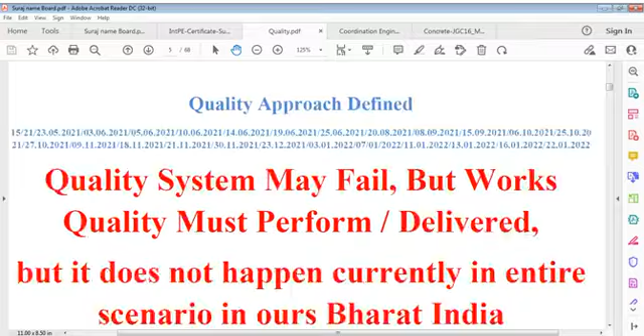We have to say, without intent to compromise, just in name of a fragile system, we make our systems at national and international level both, but we do not care for them because we just make system and think it's working automatically, complying automatically. That's just a formality, nothing.

I can say today these systems have got no meaning because products don't have quality inbuilt or quality coefficient to requirement. Therefore, quality is not in system, quality should be in product, and quality system does not guarantee that you shall get quality product. Quality is not in system, quality is not in material. This means there exists no quality in professionals, there exists no quality in workers, there exists no quality in technicians.

Everywhere quality misses. We try to say I have done so much work, but what percentage of quality I have done, I also don't know, because it is not one person's job. You take manufacturing, you take processing, you take construction, you take others. It is a group job. Nowhere does one person work alone.

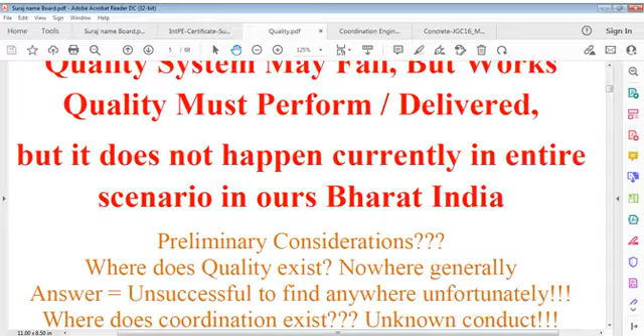That is the professional freelancing job where you can expect, if you are interested, you can get quality. Otherwise, you cannot get it. So again, I say our consideration should be, where do you exist in the idea of quality? I am in search of you. Please come and tell me. I want to take your help, and please give me help.

But he says, I have already helped. I have been helping. You are not serious about me, so why should I be serious about you? I don't find any answer from there, or you can say I don't find any reliability from my friend quality, who has defriended me, who has thrown me out, because we don't respect quality.

Quality lies within our minds, within our conscience, but we don't use it, and this means that we are red lines ourselves and not others. And can we bring it back?

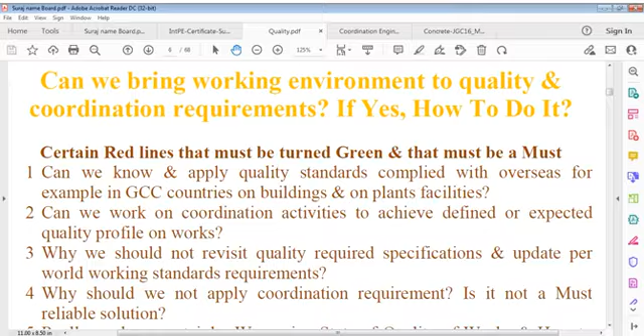My question is, can we bring working environment to quality and coordination requirements? And if I say yes, how to do it? And if I say no, why? This is not written all here, but that is the interpretation, you can say, construction of what I'm saying. And I say certain red lines that must be turned green, that's important, and that must be a must. It's not simply saying it should be, that must be a must. This means it has to be done.

So can we know and apply quality standards? That's my question to myself and to yourself. Can we know and apply quality standards? Okay, we know something, we know everything, we know books, we know rules, we know standards, we know everything, procedures, all that. But can we apply? That's my question.

We always say we are leading society, we are going to be number one in the world, we are going to lead others, but can we even equalize ourselves to existing countries near us or around us? We do not know about that. We only say we direct you, while we do not direct ourselves.

I have given an example of GCC countries, Gulf Cooperation Council countries, where there are 6 or 7 countries. If you even follow them in quality, you can change yourself. Our engineers go there, I have been where they are, and I know how they systemize everything. They are serious people. They don't want to waste money, they don't waste time, and they do something durable.

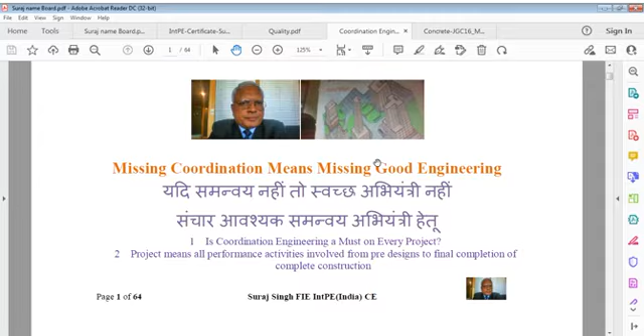That's how our question, our consideration, says: is coordination in engineering a must? That's a question mark—you have to answer it yourself. Is coordination in engineering a must? Everybody says—sometimes I've seen many people say, 'I'm a coordinator,' but what coordination means, they don't answer. See, there's a difference between coordination and liaison.

I'm not talking of liaison. Liaison is a part of coordination, not a domain in itself. Sometimes people interact with each other and consider this coordination—no, that's not coordination, that is interaction. There's no difference because you're just coordinating with others, or chatting with others, and sometimes talking of work, but that cannot be called coordination engineering because that's interactive engineering.

Coordination is where information is required. You don't have information, you seek that information. Without that information available, you cannot do anything, you cannot proceed further. Therefore coordination is a technical term, an engineering term—it demands something. Every activity demands something, every urgency demands something. We have to bring some information, or many pieces of information, to one place if that information is required for some activity to move, and that information should come in time also.

It's not that we get the information now and say, 'I'll provide you this information later on.' How can you then move this work? You cannot move that work. And that's where coordination has many orientations—it has many inputs, and it requires inputs instantly. It doesn't wait.

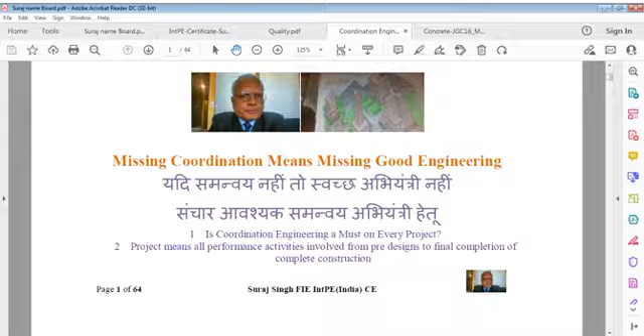There are many projects in your life. Being an engineer, you may have 10, 15, 20 projects in life, depending on length of projects. Sometimes you have hundreds of projects, maybe very small ones.

There are many questions we can raise here. Engineering community has to answer and raise itself: what's quality and coordination, how you can define that in respective involvements in entirety, how these are applicable. Can we ignore these domains? That's the point - if you can ignore this, what shall you get? What benefit do you get if you ignore these domains? And the benefit is no benefit. You can't ignore it. If you ignore this, you ignore yourself, you ignore your capacity, and that is a very dangerous situation.

You cannot ignore it. So quality and coordination can't be ignored - these are respective involvements in respective terms with each other. We can't ignore them. So what do engineers think about these issues? Whatever you talked about working, what do you think about that? Do you think or not? If you think, what do you think, and to what degree? Many questions come out - how many of us conduct work for quality and coordination engineering?

It's the right time to contemplate and deliberate on this subject, because if you start quality work, believe me, if you care for quality, all the world would change. If society cares for quality, if engineers think of quality, if workers think of quality - this is my first requirement.

Just like in safety we say, I should be safe first. In safety domain - the common domain of safety, health and environment - what do you say? First let me be safe, then I will start work. And it's right, I have to keep myself safe, keep others, my colleagues, my workers, co-workers safe. I have to keep everyone safe, then I start work. What's wrong with that? It doesn't mean you have to spend more time - time is the same, only the conduct, how to conduct, is different.

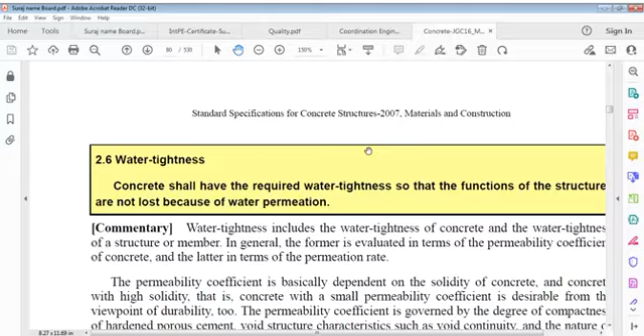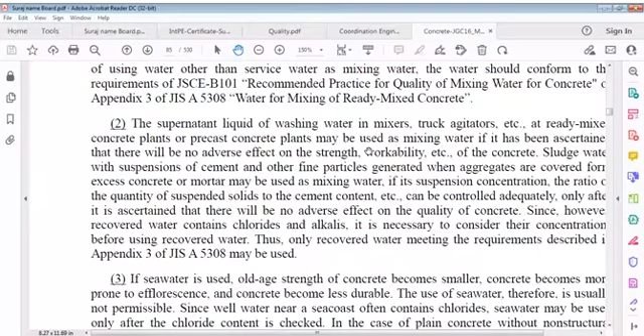And we're talking about items of concrete last time. Of course, it's very important. We have covered many pages on this, and water tightness we are talking, and we are talking about constituent materials, cement, etc. We talked about mixing water, I think we talked about this, right? And also aggregates, fine aggregates. On this page, I think we did not talk, so we have to go to it.

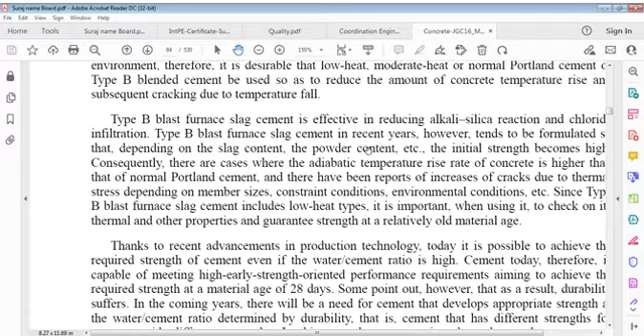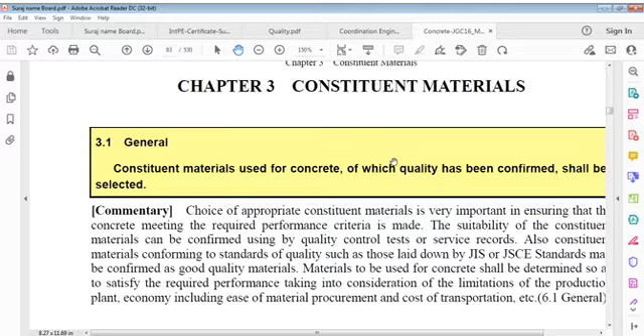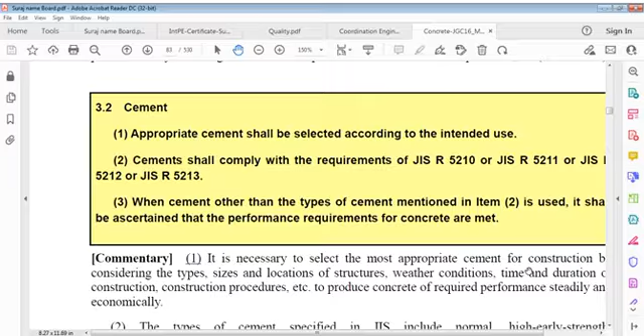It says cement, appropriate cement shall be selected according to intended use, and that's true. Cement shall also comply with requirements. When cement other than types mentioned is used, it shall be ascertained that performance requirements of concrete are met. That's true. Now what does the commentary say?

Let's come into here, let me put off my switch of battery so that it keeps on working, and let's see how does it work. And let's put a battery also.

Weather conditions, time and duration of construction - I think we should keep something here, duration of construction. It's necessary to select the most appropriate cement for construction by considering type, size, and location of structures, weather conditions, time, and duration of construction procedures, and to produce concrete that performs steadily and economically.

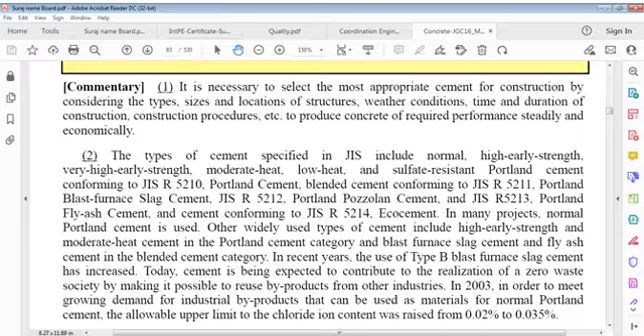Types of cement specified include normal, high early strength, very high early strength, moderate heat, low heat, and sulfate resistant Portland cement; blended cement conforming to Portland blast furnace slag cement, Portland pozzolana cement, Portland fly ash cement, and cement conforming to eco cement. I think we have gone through this eco cement in many projects.

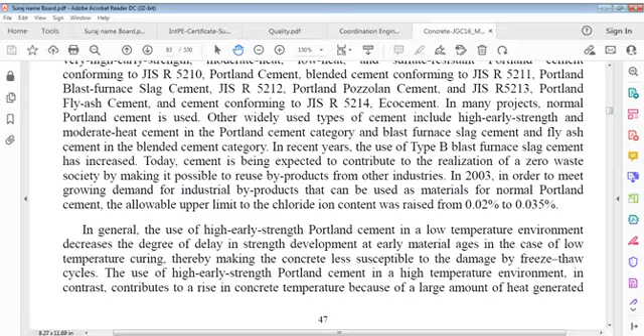Normally, normal Portland cement is used. Other widely used types of cement include high early strength and moderate heat cement or Portland cement, and blast furnace slag cement and fly ash cement.

Blended cement is being expected to contribute to realization of a zero waste society by making it possible to reuse byproducts from other industries. In 2003, in order to meet the growing demand of industrial byproducts that can be used as materials for normal Portland cement,

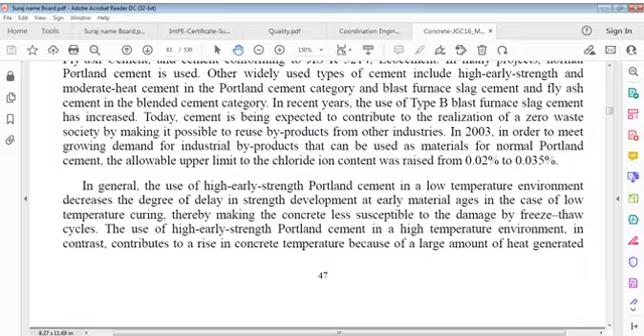the allowable upper limit for the chloride ion content was raised from 0.02% to 0.035%. I think we have gone through this.

In general, use of high early strength Portland cement in a low temperature environment decreases the degree of delay in strength development at early ages. Where there is low temperature, you can say high early strength Portland cement is a good one, especially in case of low temperature curing, thereby making concrete less susceptible to damage by freeze-thaw cycles.

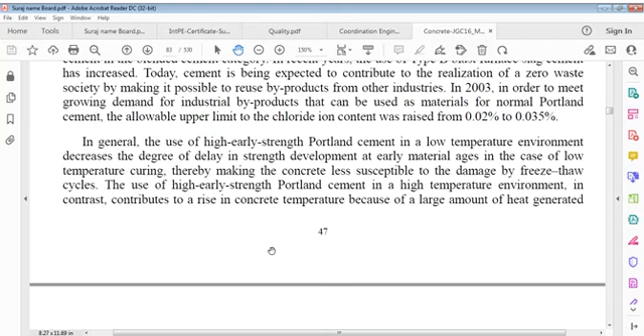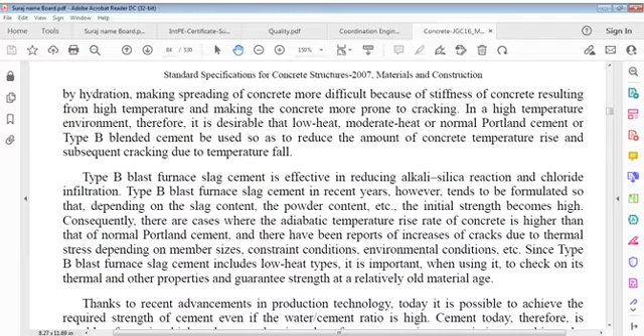Use of high early strength Portland cement in a high temperature environment, in contrast, contributes to a rise in concrete temperature, making it more difficult because of the stiffness of concrete resulting from high temperature, and making concrete more prone to cracking in high temperature environments. Therefore, it's desirable that moderate heat or normal Portland cement or type B blended cement be used so as to reduce the amount of concrete temperature rise and subsequent cracking due to temperature fall.

Type B blast furnace slag cement is effective in reducing alkali silica reaction and chloride infiltration. However, in recent years, type B blast furnace slag cement tends to be formulated depending on slag content and powder content, so that initial strength becomes high in this cement.

However, depending on slag content and powder content, initial strength becomes high, and consequently there are cases where the adiabatic temperature rise rate of concrete is higher than that of normal Portland cement. Let me also see the explanation for this, as it's an important point here.

That is here, let me just take a minute please. Let me explain also that one. Concrete temperature, let's see, let's start, let's Google it. This concrete - I waste time sometimes, I know, concrete adiabatic...

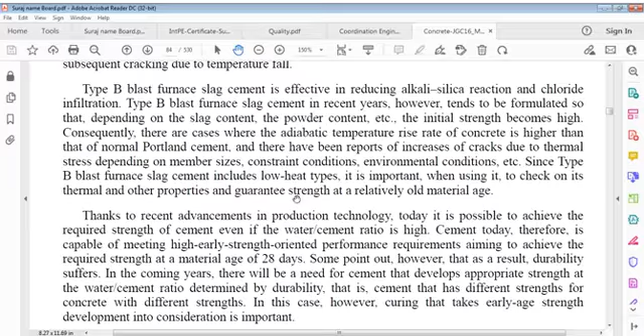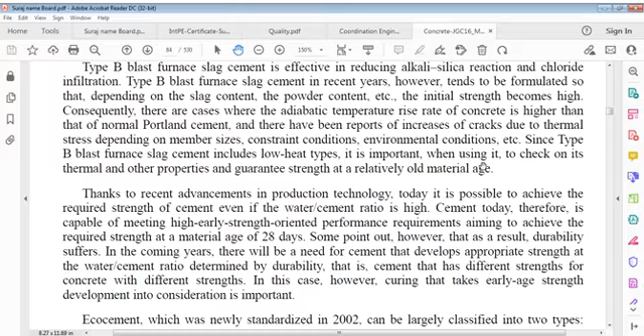Adiabatic temperature rise rate of concrete is higher than that of normal Portland cement, and there have been reports of increase of cracks due to thermal stress depending on member sizes, constraint conditions, and environmental conditions. Since type B blast furnace slag cement includes low heat types, it's important when using it to check on its thermal and other properties and guarantee strength at relatively old material age.

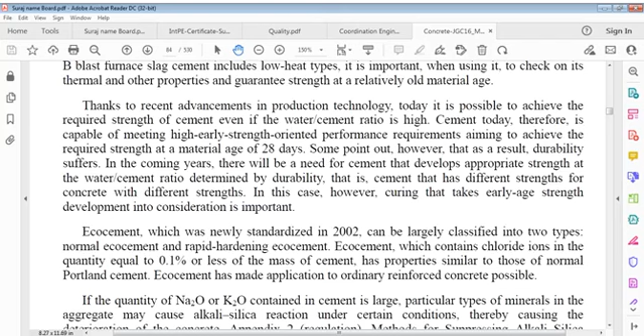Thanks to recent advancement in production technology, today it's possible to achieve required strength of cement even if water cement ratio is high. Cement today, therefore, is capable of meeting high early strength oriented performance requirements, aiming to achieve required strength at a material age of 28 days. Some point out, however, that resultant durability suffers.

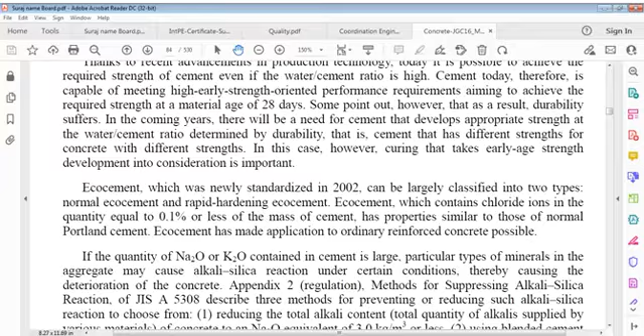In coming years, there will be need for cement that develops appropriate strength at water cement ratio determined by durability, and cement that has different strengths for concrete with different strengths. In this case, however, curing that takes early age strength development is important to take into consideration.

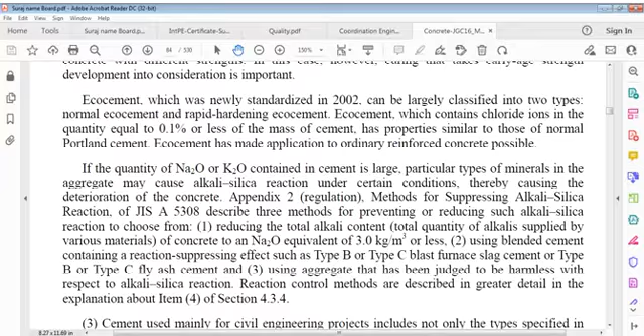Eco cement, which was newly standardized in 2002, can be largely classified into two types: normal eco cement and rapid hardening eco cement. Eco cement which contains chloride ions in quantity equal to 0.1% or less of mass of cement has properties similar to those of normal Portland cement. Eco cement has made applications to ordinary reinforced concrete possible.

If the quantity of Na2O or K2O contained in cement is large, particular types of minerals in aggregate may cause alkali silica reaction under certain conditions, thereby causing deterioration of concrete. Appendix 2 regulation methods for suppressing alkali silica reaction describes three methods for preventing or reducing such alkali silica reactions to choose from.

Number one, reducing total alkali content, the total quantity of alkali supplied by various materials of concrete, so that Na2O equivalent is 3 kg per cubic meter or less. Number two, using blended cement containing reaction suppressing effects, such as type B or type C blast furnace slag cement, or type B or type C fly ash cement. Number three, using aggregate that has been judged to be harmless.

With respect to alkali silica reaction, control methods are described in greater detail in the explanation of item 4 in section 4.3.4. So it says, first, reducing total alkali content, that's total quantity of alkali supplied by various materials of concrete when Na2O equivalent is 3 kg per cubic meter or less. Then second is using blended cement containing reaction suppressing effects, such as type B or type C blast furnace slag cement, or type B or type C fly ash cement, and using aggregate that has been judged to be harmless.

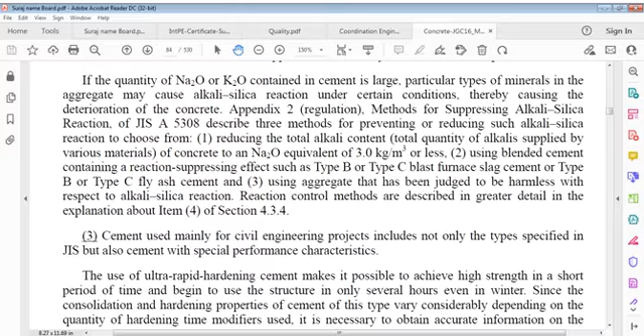Cement used mainly for civil engineering projects includes not only types specified here but also cement with special performance characteristics. Use of ultra rapid hardening cement makes it possible to achieve high strength in a short period of time and begin to use the structure in only several hours, even in winter.

Use of ultra rapid hardening cement makes it possible to achieve high strength in a short period of time and begin to use the structure only several hours after, even in winter. Since the consolidation and hardening properties of cement of this type vary considerably depending on the quantity of hardening time modifiers used, it's necessary to obtain accurate information on consolidation properties at the temperatures at which the cement is used.

Other special types of cement include ultrafine cement, alumina cement, oil well cement, geothermal well cement, white Portland cement, and colored cement. When deciding to use these special types of cement, it's good practice to carefully study past construction records and conduct thorough tests in advance.

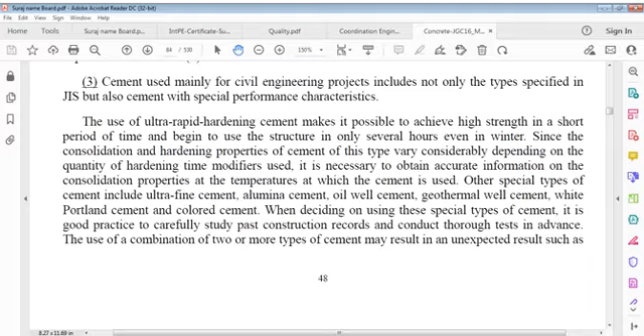The use of a combination of two or more types of cement may result in unexpected results, such as quick setting in a mixture of alumina cement and Portland cement. When mixtures of different types of cement are used, it's necessary to ascertain that such mixtures would not have adverse effects on the performance of concrete.

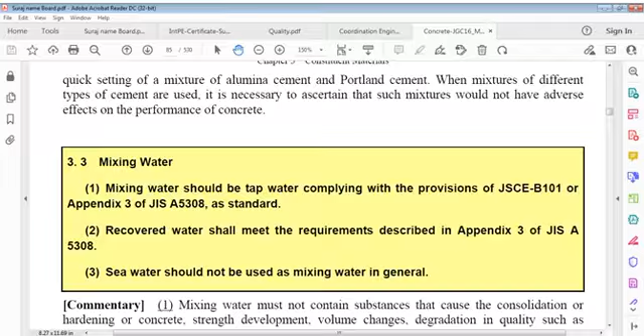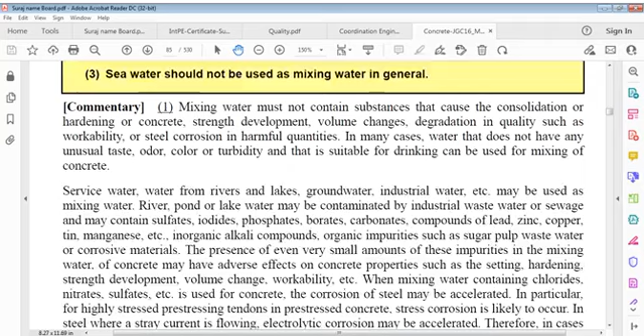Mixing water should be tap water complying with provisions, and recovered water shall meet the requirements described. Seawater should not be used in mixing water in general, and mixing water must not contain substances that cause consolidation or hardening of concrete.

Mixing water must not contain substances that cause consolidation or hardening of concrete, development, volume changes, or degradation in quality such as workability, or steel corrosion, in harmful quantities.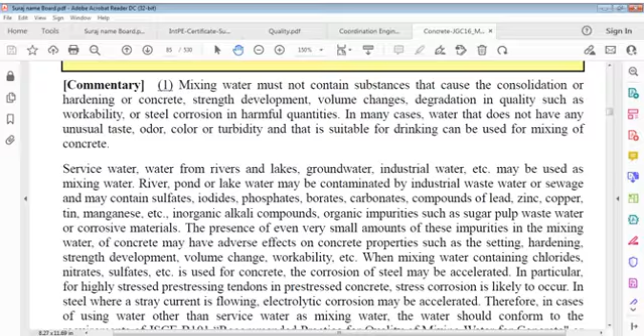In many cases, water that does not have any unusual taste, odor, color or turbidity and that is suitable for drinking can be used for mixing concrete. Suitable water sources include surface water from rivers and lakes, groundwater, and industrial water.

River, pond or lake water may be contaminated by industrial wastewater or sewage and may contain sulfates, iodides, phosphates, borates, carbonates, compounds of lead, zinc, copper, tin, manganese, inorganic alkali compounds, and organic impurities such as sugar, pulp, wastewater, or corrosive materials.

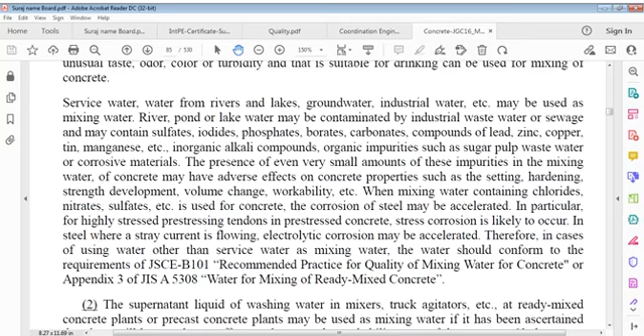Presence of even very small amounts of these impurities in mixing water of concrete may have adverse effects on concrete properties such as setting, hardening, strength development, volume changes, and workability.

When mixing water containing chlorides, nitrates, sulfates, etc. is used for concrete, corrosion of steel may be accelerated.

In particular, for highly stressed pre-stressing tendons in pre-stressed concrete, stress corrosion is likely to occur. In steel where a stray current flows, electrolytic corrosion may be accelerated.

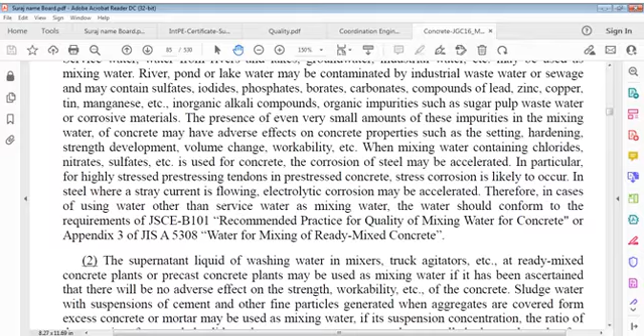Therefore, in cases of using water other than surface water as mixing water, it should conform to requirements in recommended practices for quality of mixing water for concrete, and Appendix 3, water for mixing of ready mixed concrete.

Supernatant liquid of washing water in mixers, truck agitators, etc. at ready mixed concrete plants or precast concrete plants may be used as mixing water if it has been ascertained that there has been no adverse effects on strength, workability, etc. of concrete.

Sludge water with suspension of cement and other fine particles generated when aggregates are recovered from excess concrete or from mortar may be used as mixing water.

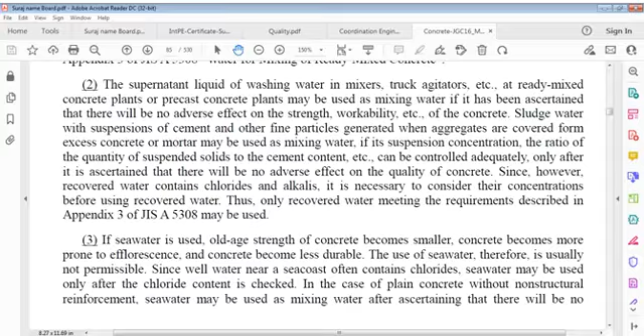If its suspension concentration ratio of quantity of suspended solids to cement content, etc., can be controlled adequately, it can only be used after it is ascertained that there will be no adverse effect on quality of concrete. Since recovered water contains chlorides and alkalis, it is necessary to consider their concentrations before using recovered water. Only recovered water meeting the described requirements should be used.

If seawater is used, old age strength of concrete becomes smaller, concrete becomes more prone to efflorescence, and concrete becomes less durable. Use of seawater, therefore, is usually not permissible, since well water near a sea coast often contains chlorides. Seawater may be used only after chloride content is checked.

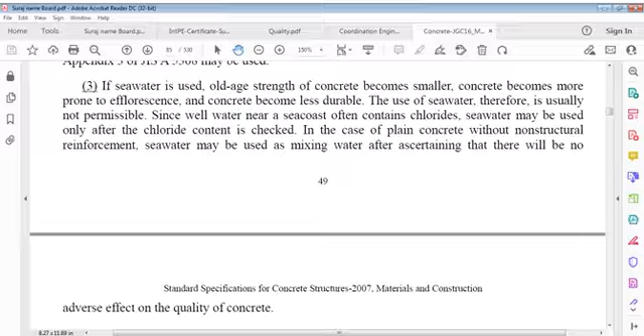In case of plain concrete without non-structural reinforcement, seawater may be used as mixing water after ascertaining that there is no adverse effect on quality of concrete.

So I come to aggregate, fine aggregate. Fine aggregate shall be clean, hard, firm, durable, chemically or physically sound, and not contain a harmful amount of dust, mud, or organic impurities.

Fine aggregate shall be clean, hard, firm, durable, chemically or physically sound, and not contain a harmful amount of dust, mud, organic impurities, chlorides, etc. We are talking of sand or dust: it should be clean, it should be hard, not soft, it should be firm, durable, chemically or physically sound.

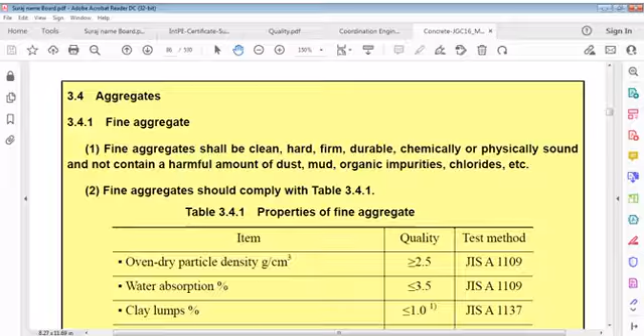Fine aggregate should comply with table 3.4.1 properties for fine aggregate. Oven dry particle density in grams per centimeter cube should be more than or equal to 2.5. Water absorption percentage should be less than or equal to 3.5.

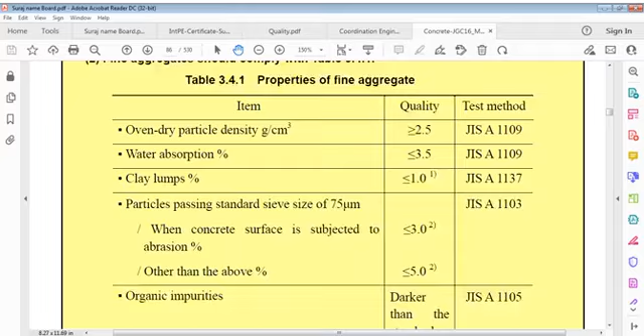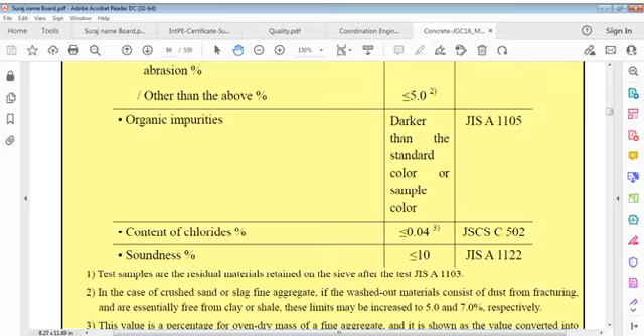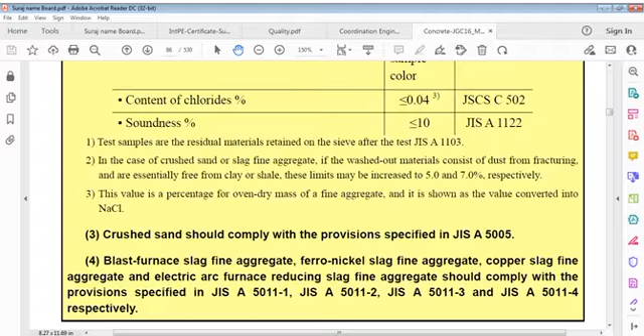Clay lumps should be less than 1. Particles passing standard sieve size 75 micron, when concrete surface is subject to abrasion, should be less than or equal to 3, otherwise less than or equal to 5. Organic impurities should not be darker than the standard color sample. Chloride content should be less than or equal to 0.04, and soundness percentage less than or equal to 10. Test samples are residual materials on sieve after test.

Test samples are residual materials retained on sieve after test. In case of crushed sand or slag fine aggregate, if washed out, materials consist of dust from fracturing and are essentially free from clay or shale. These limits may be increased to 5 and 7% respectively. This value is a percentage for oven dry mass of fine aggregate, as shown as value converted into NaCl.

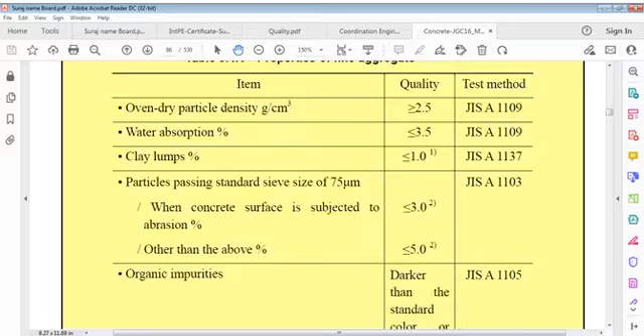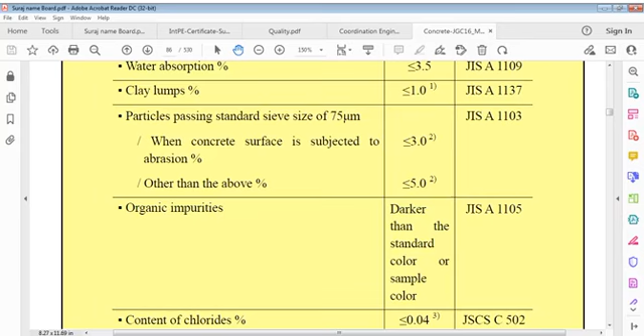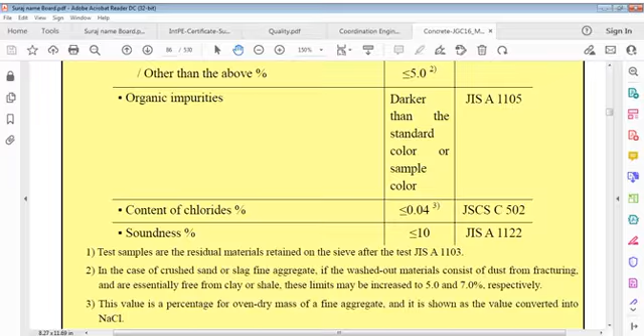So what is that? In fact, we are talking of fine aggregates. Organic impurities darker than standard color or sample color. Contents of chlorides less than or equal to 0.4, 0.04. Soundness is less than or equal to 10.

Test samples are residual materials retained on sieve after test. In case of crushed sand or slag fine aggregate, if washed out, material consists of dust from fracturing and is essentially free from clay or shale. These limits may be increased to 5 and 7% respectively. This value is a percentage for oven dry mass of fine aggregate and is shown as value converted to NaCl. Crushed sand should comply with the provisions noted.

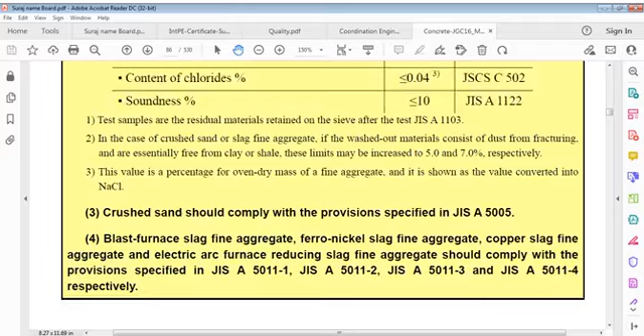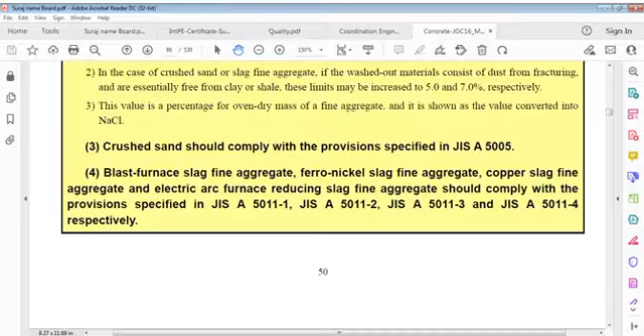Blast furnace slag fine aggregate, ferro-nickel slag fine aggregate, copper slag fine aggregate, and electric arc furnace reducing slag fine aggregate should comply with provisions specified in this. Recycled fine aggregate should comply with provisions specified here.

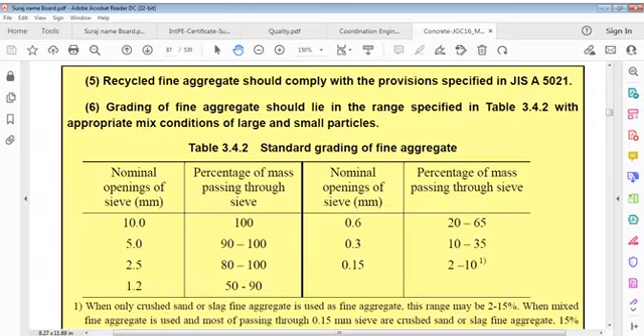The grading of fine aggregate should lie in the range specified in this table, with appropriate mix conditions of large and small particles. Here is the standard grading of fine aggregate, nominal opening of sieve size and percentage of mass passing through this sieve. I'll take up this next.

Now we are talking quality and coordination, and this is a very, very important one. We cannot avoid this at any cost. We have to be very serious in this issue, because it's not jokes, and this issue of engineering knowledge is something people very rarely treat seriously.

I try to get information from internet and through papers and through various postings, various files. It's not necessary, because quality cannot be achieved in universities. You cannot learn quality in universities. There's no such topic or subject available in graduation, post-graduation, etc. We have to graduate ourselves without any of that.

It's very easy these days to get competent, consistent information from the use of internet. Sometimes we get it, sometimes we don't. But my concern is that I've tried many times during my sessions, and otherwise also, to get more information of quality and coordination. But it's unfortunate that I'm not getting any practical information from engineers.

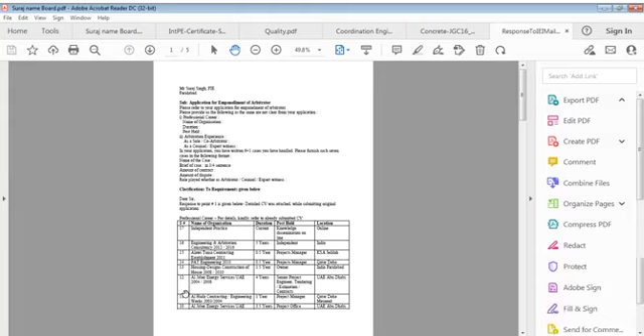This is on 15th January, I sent it back. That's one part. I think I just discussed this with you. It's also important, just a few references to my past career. Actually, this is my professional career. For details, kindly refer to the already submitted CV.

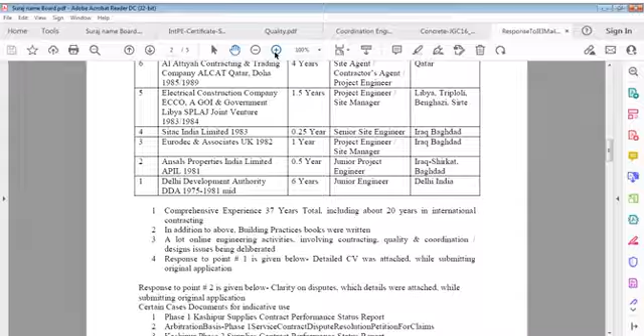This was sent in response to my application to the Institution of Engineers India. I sent it long back. In this case, I'm showing, let's say, there are some companies here. I try to show my claims issue also here, may say claims issue.

And I'll share my CV with you in detail. Let me tell you about my career. I started my career in...

Then I joined Eurodec & Associates UK in 1982, worked for 1 year as project engineer, site manager, in Iraq Baghdad. Sitac India Limited, 1983, 0.25 years, senior site engineer in Baghdad.

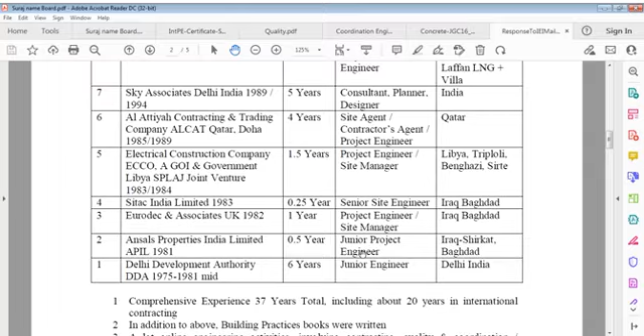Electrical Construction Company (ECCO), a joint venture between the government of India and the government of Libya, Socialist People's Libyan Arab Jamahiriya, 1983-84. I worked there as project engineer, site manager, in Libya - Tripoli, Benghazi, Sirte.

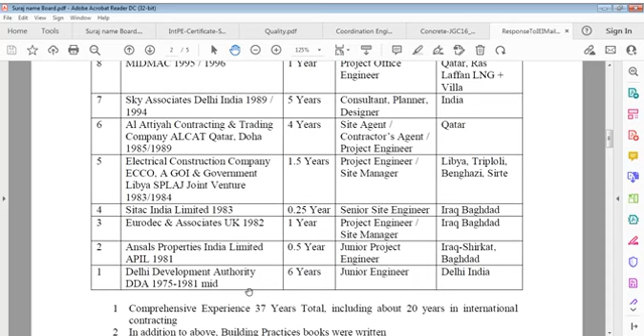I worked at Al Attiyah Contracting and Trading Company, ALCAT, Qatar, Doha, 1985-1989, 4 years, as site agent, contractor's agent, and project engineer in Qatar.

Sky Associates Delhi, 1989-1994, my own practice as consultant, planner, designer. Then with MIDMAC, a Lebanese company, 1995-96, 1 year, as project office engineer, Qatar, Ras Laffan LNG and Villa.

Then Khalsa Contracting and Trading, 96-99, 1.5 years as chief engineer in UAE, Abu Dhabi. Then Al Jaber Energy Services, UAE, 3.5 years, project office.

This was for the project office on site in UAE, Abu Dhabi, at Ruwais, 1999-2003.

Then housing designs and construction of a house in 2008, 1.5 years - I designed and built my own house myself. Then Pat Engineering, 2010, 1.5 years, project manager, Qatar Doha, Alawi Tunsi company.

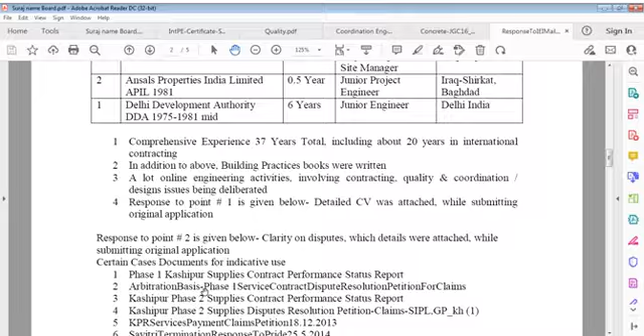The response to the point - I'll take up some other issues later on, and I have to close this now. It's already 3 hours lapsed, so I just tried to show you my involvement in this, which is a really important point. You can just see these files again to show you what's happening.

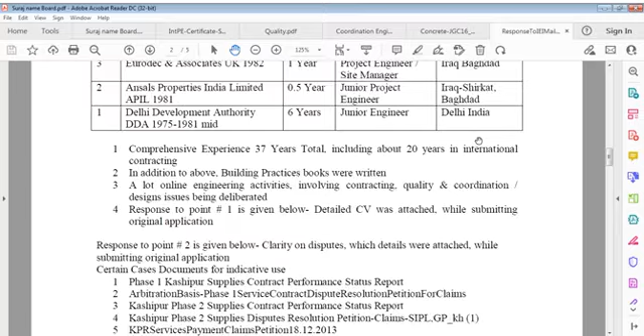Also, we can talk about retaining rate. I'm just trying to say that it's not necessary you should be somewhere - it should be everywhere.

So I'll close this file. I'll try to show my CV file as well, as it's necessary to show at this moment - just a glimpse of what you can see.

But that's not... oh okay. Let's see, what's that? I think let me print it better. Is this open with?

It's going to open this. Let me open it as it is and print it first - I think that's the only way. Let me print it and show you a glimpse of that, not in word form but in print form, you can say.

So let's do it - it's coming, only a few pages, maybe it's done. I think it's come, so this is it. Okay, that's fine, so this is my CV file, after 21, 22%.

So we'll take up this issue also - it's important also. No, it's not here. Just for this, I'll say it's gone quite long, it will take much time, so...